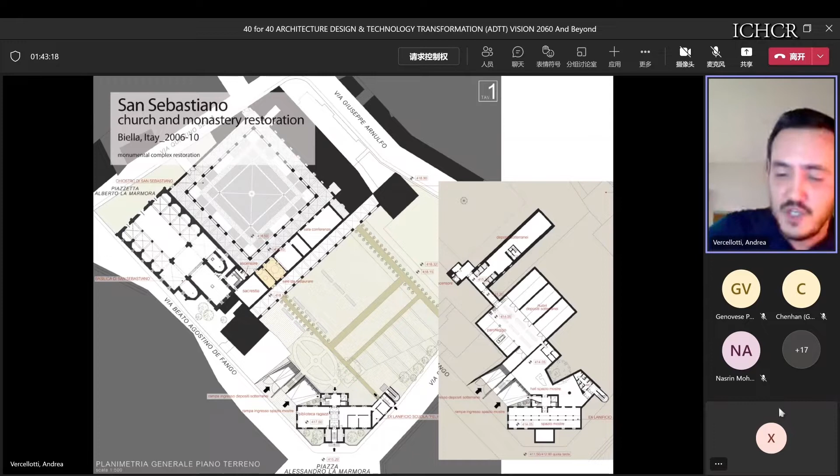I can show you other images. That was the cloister, partially renovated slowly by time, the building repaved. As I told you, it became a sort of open piazza. That's the design for the underground spaces. And then the inside was slowly transformed into an archaeological museum. So that was really a typical Italian project.

Then I had the chance to be part of another very interesting project. This was a project where I was not the main architect - it was a project of Antonio Citterio and Patricia Viel, two designers very well known in Italy and even all over the world. It was another project very related to memory and the sense of historical places.

This is a project done in L'Aquila, a city in central Italy, not far from Rome, that was strongly damaged by an earthquake. All the churches were damaged, so they were closed to their function. The municipality decided to build a temporary church with some temporary functions for the people affected by the earthquake - houses, a canteen - but trying, in a certain sense, to give a contemporary interpretation of the historical role of churches and their spaces in the city of L'Aquila. So this has been the project.

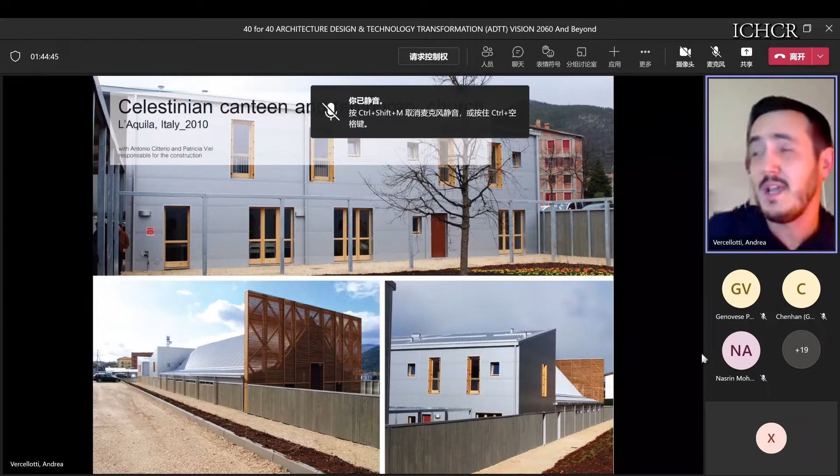It was all done in wood and prefab, since it was temporary. You can see here the typical facade from the Abruzzo region, so it was a reinterpretation of this. It was a great effort to reconnect this building with the neighborhood close to it, and in a certain sense create, even if temporary, a piece of the city itself. Some images - that's the general maquette and the general project.

Another very small project, but one I found very interesting, was the Taiwan Food Culture Pavilion for Expo Milan 2015. It was a very small and simple project, a wood pavilion, all built thanks to fundraising.

But it was very interesting for us because, in a certain sense, it was a critical approach to the Expo and to those kinds of events inside the city. Instead of working inside the precinct of Expo, out of the city, we asked the municipality to locate it in the core of the city.

So we were located in Piazza Santo Stefano, 500 meters from the Duomo, the Cathedral of Milan, and we used this pavilion to create a sort of small device that produced different uses inside the space of the core of Milan. We can call it tactical urbanism, a word I don't really like, but in a certain sense it was a small tactical urbanism. All the area was made pedestrian. Different uses alternated during the year of the Expo. The State University, which is behind that building, was very much part of the project - students were there to rest, to study. So it became a very interesting relation between the architectural object and the uses of the city itself.

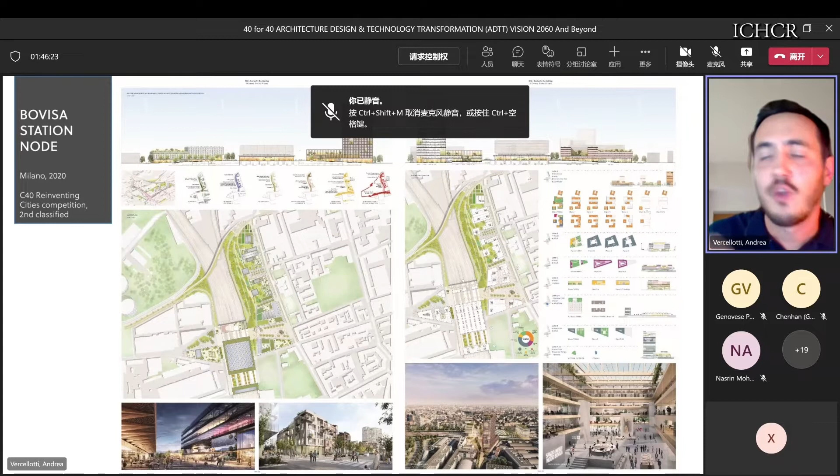As I told you, the kind of projects I face and the kind of projects I'm part of really changed when I moved to work with Arcadis Italia. I told you I entered the sector of urban regeneration before as a consultant. Today, from this year, I'm sector leader for government, so I'm responsible for Arcadis in Italy for all the big projects of urban regeneration related to private investors and urban authorities. We do this all over Italy, in Milan, in Genova, in many contexts.

I can give you a few examples to help you understand how the kind of project changed. This was a project, second classified, a big disappointment, for the Bovisa station node - an entire neighborhood, an infrastructural node, one of the stations of Bovisa, to be completely rethought to connect the two sides of the city.

So that was the station, but it's more visible in the next image. I was leading the project on the Arcadis side. The main architect was One Works, another important Italian firm.

Now the effort was again to recreate a connection between the two sides, starting from some environmental items. For example, we decided to maintain the so-called Bosco della Bovisa forest, a self-produced forest inside the city of Milan. We tried to recreate a connection between the open spaces with a bridge that connects the two sides.

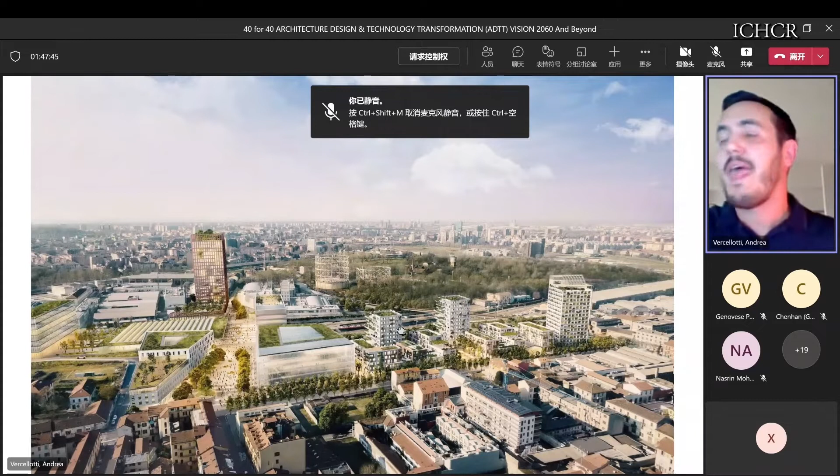This is the station, and this is the new headquarters of FNM, a private railway society. At the roots of all this process, we interlace and coordinate many approaches that give sense to the project - from water management to pollution, to dialogue and social interaction with the borough itself. All the different disciplines, till the economical items, were merged together to produce this project.

You can see that's the main square connecting the two sides. This is the main building in front. We were even asked to include the La Scala Theater, so we thought about some performing art spaces in front of the station. That was the result.

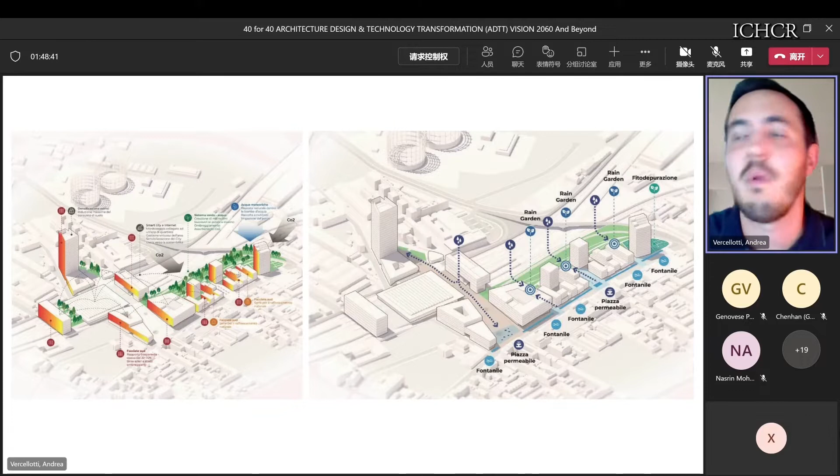As I told you, at the base of the project, each discipline produced its conceptual diagram, conceptual scheme - here in terms of climate adaptation, in terms of water management. We tested many solutions, not necessarily technological. We always think that technology is not always the best solution. We try to work with other levels of the project to create sustainability from many points of view.

The main item was to make the client understand - if you consider the plot at the scale of the plot itself, it's very difficult to imagine a future for the area. But if you approach it with a wider point of view, you can transform this area into the core, the connective element between a lot of very important poles all around the city - which is, physically speaking, this connection.

This red line will be a so-called cycling highway, a main infrastructural sustainable mobility network that will connect very important poles for the city of Bergamo, creating a system that will regenerate the entire southwestern part of the city in the next decades.

So that's the main plan. Here you can see some objectives like the previous one: no cars at all on the surface, all the cars go below, complete de-paving of everything. It will be an energetical community, completely self-sufficient, etc. But it will also be infilled by significant functions that maintain the memory of the place as a productive place, as part of the industrial history of the city, while including new possible uses.

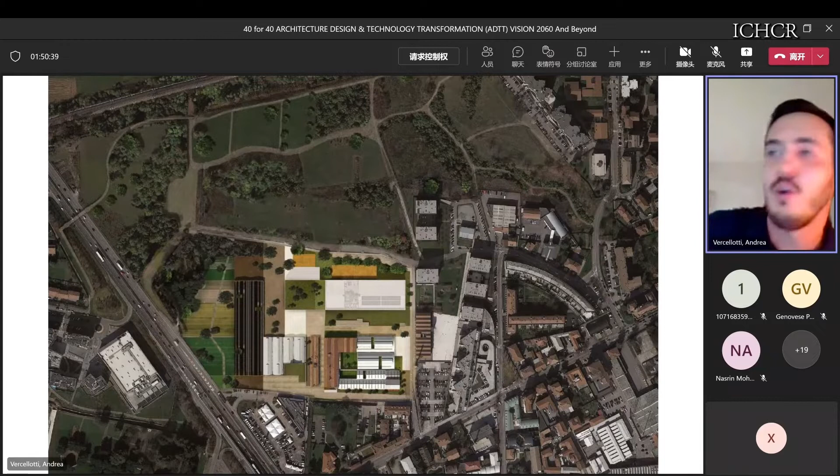These are some views. It will be completely open to the city - that will be the main piazza, that will be a sports center. And now, what started this summer is that the working area is active. Fortunately, we succeeded to start - in Italy, it's not always easy to start with projects of this size.

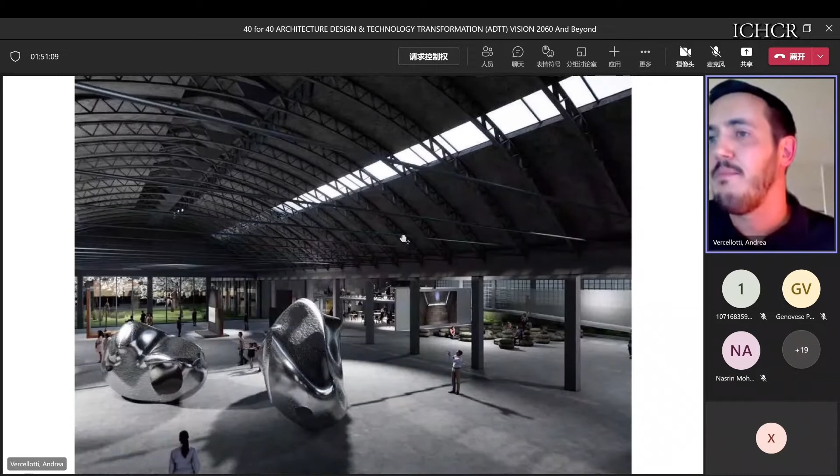This is the contemporary art space for the city of Bergamo. It's a soft intervention on an existing building that will be transformed with just a few adaptations into a center for contemporary arts, with a garden inside, and all the rest.

Last one, to stay in time, is a small project, but it's very important to make you understand which kind of processes we propose to the city. This is a small project in Paullo, a city in the southeast metropolitan area of Milano - a small town that was an agricultural village that exploded after the economical boom after the Second World War, never producing a center.

So we were asked to transform one building. We said to the municipality: we have to transform the entire central district of the village, so we have to create a new centrality for the town of Paullo.

So starting from this project, for the new cultural integrated center with the library and other social activities, slowly all these buildings will be regenerated, restored or transformed and rebuilt to create a centrality. A few images very fast because the time is gone.

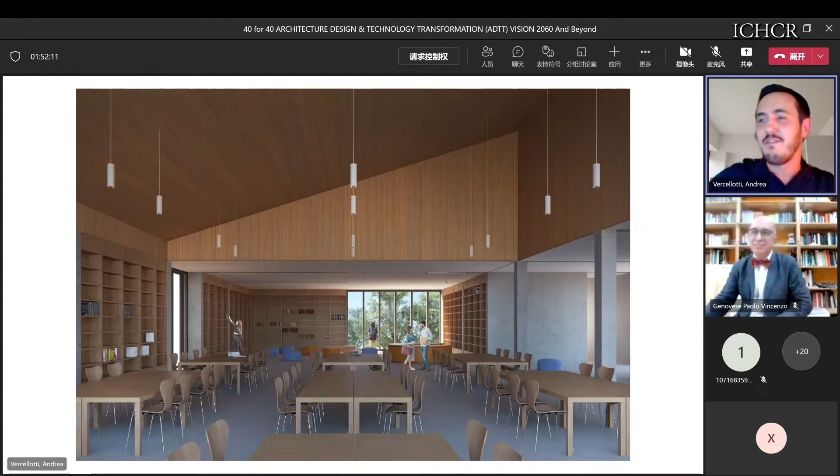To answer your question, Professor Genovese, I haven't followed your request of making a 50-50 intervention, but I really think the next 40, 50, who knows how many years of my life are concentrated in these kinds of projects. In a country like Italy, where the population is decreasing and we've built everywhere, the main task is to give new sense and continuously recombine the sense of pieces of the city we work in.

Thank you very much. Thank you. Very interesting project.

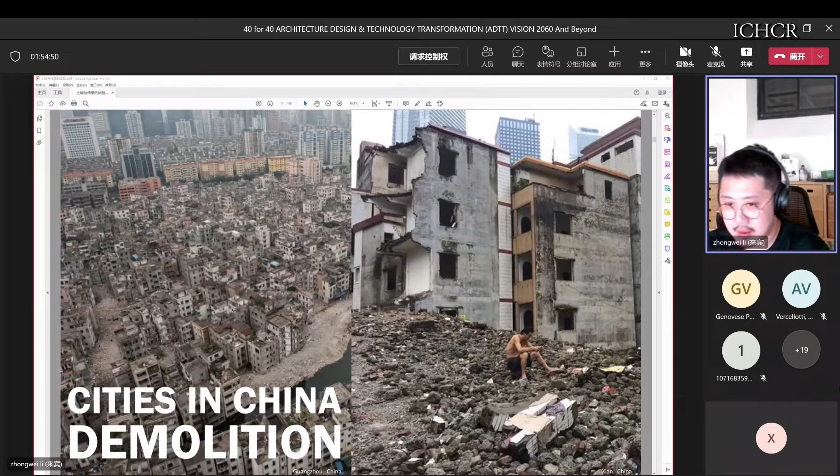And also by the city booming, we demolish so many villages and buildings in the cities, at super high speed. And instead, we replace them with a lot of meaningless structures, architectures, and landscapes.

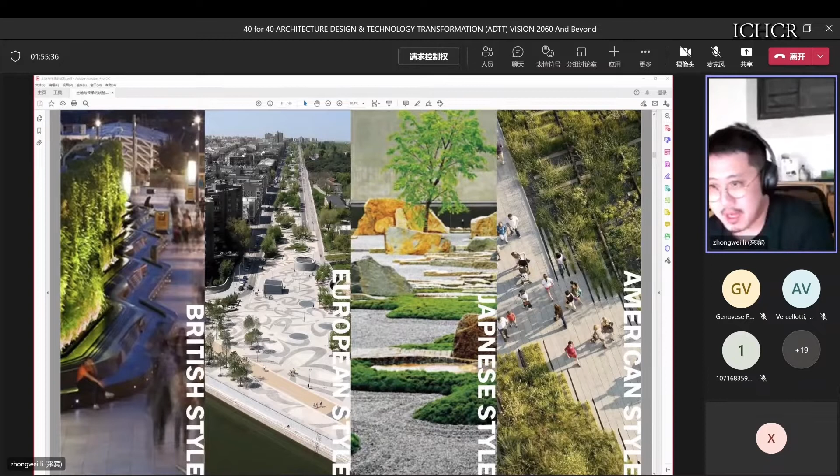In the following decades, we keep copying from other countries, from British, European, Japanese, and Americans. This project is from maybe 10 years ago. People think Chinese creative things have become more creative now, but I don't think so. We're still copying from Westfield in London, Madrid in Spain, Japanese designs, and the Highline in America. We're still in the copying process.

People call them 'Burning Man.' So many people gather in the desert and create crazy structures and hold super crazy carnivals, then they burn the masterpiece after 7 days. We think the whole of China right now is in this crazy Burning Man show.

People always say existence is reasonable, but I don't think so. Existence is not necessarily reasonable - only those that have passed the test of time are reasonable. That means we don't want to stay in the dream. We want to be real.

That's why we came up with our topic, Dirt and Heritage. In Chinese history, over the passing times, dirt and heritage are inherited in our paintings at large or small scale. It also shapes our landform, and our landform or geography shapes our culture - just like what's happening in Chongqing, Chengdu, and Shanghai, which is a delta, meaning people there are more civilized and more business-oriented.

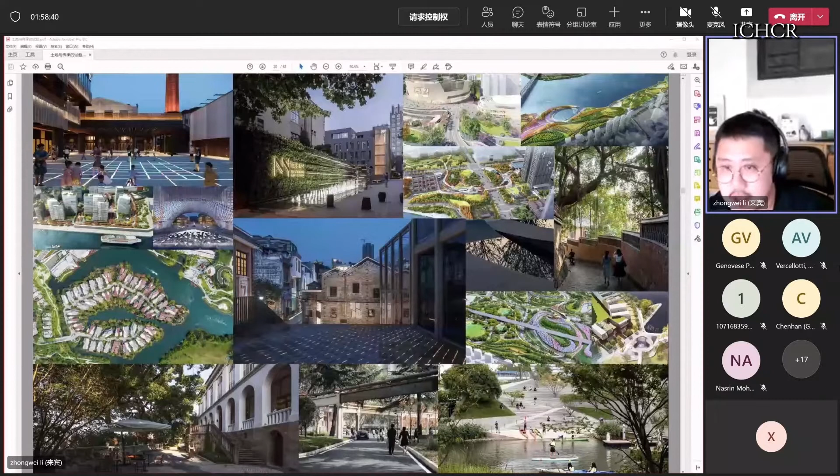This collage shows our office photos - some projects we are working on, some being built in the future, and most of them related to these two words: Dirt and Heritage.

In our ideas, when the scale is getting smaller, we are more inclined to treat them in a heritage way. And when the scale gets bigger, we are more focused on dirt - we research landforms and land art.

About dirt - like the project we did in Chengdu, we created valleys to let people have a different feeling playing in the parks. We have water, mist, and nature combined with concrete to shape and bring nature and some memories back to the cities.

We try our best to mimic how water cuts the land, how nature shapes the world. This landform is like the Minjiang valleys, where we're searching for a way that shows how the water comes to Chengdu.

This is another part of the park. We're trying to create an interesting canal which mimics the way people deal with water in Chengdu, where children can play with water or with canals just underneath the water level in the parks.

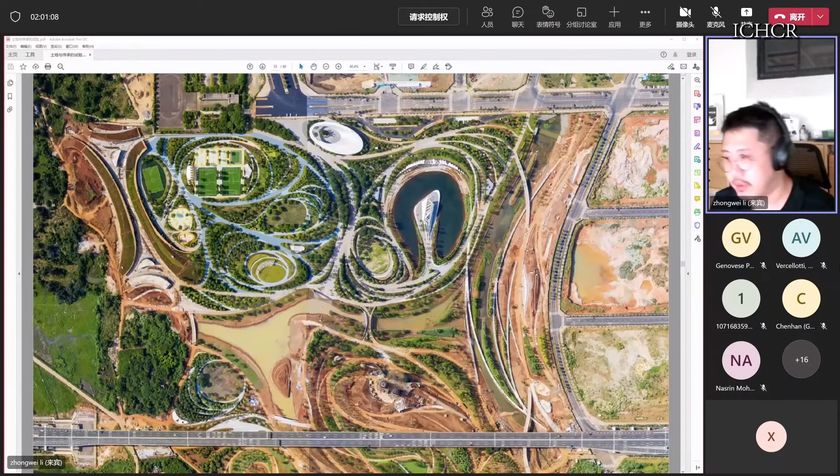We also have so many middle scale or large scale parks like that. About heritage - it's how to keep the memories, just like how we reshape some useless

engines into landscape elements to let people enjoy them, or we directly make a pipeline into seating elements or green walls. We recycle useless things into useful playgrounds.

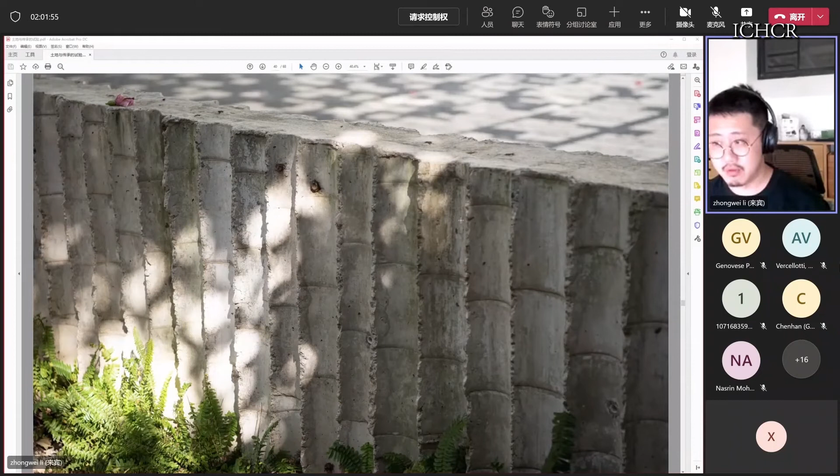We're also trying to use leaves to print them onto really boring concrete. We can recycle useless borders and make them into water features. Or even in the concrete, we use bamboo to print patterns to give it more

memories. Even with the cheapest material, we still try to keep some memories of neighborhoods, some lifestyles, in the design. Even you can see this is a concrete step.

We try our best to add more details on top of it. You can see how people get involved in the memory and the design.

Even at night, we try to add more art to the existing trees or shape the existing borders into linear water features. Maybe everything can be recycled and everything can be redesigned.

We also can recycle by checking libraries, searching for old photos and making them into new designs, turning the real black and white photos into real works.

We respect all the trees and try to let nature and history come back together. We can even make hidden ginkgo trees visible to the citizens.

We save the dying trees and make them into landscape elements. We also try to keep all the trees and create a site which is subtle, decent, and full of nature and memories from day to night.

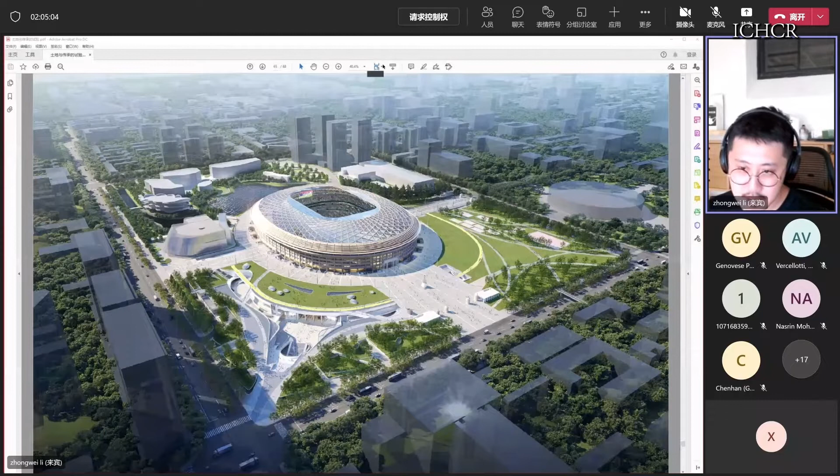What's happening now combines landscape, mixed use, heritage, and dirt together - just like what's happening in Beijing or Shanghai. These are two projects we're working on. I think we will not change, and we will stay with reality and keep researching dirt and heritage.

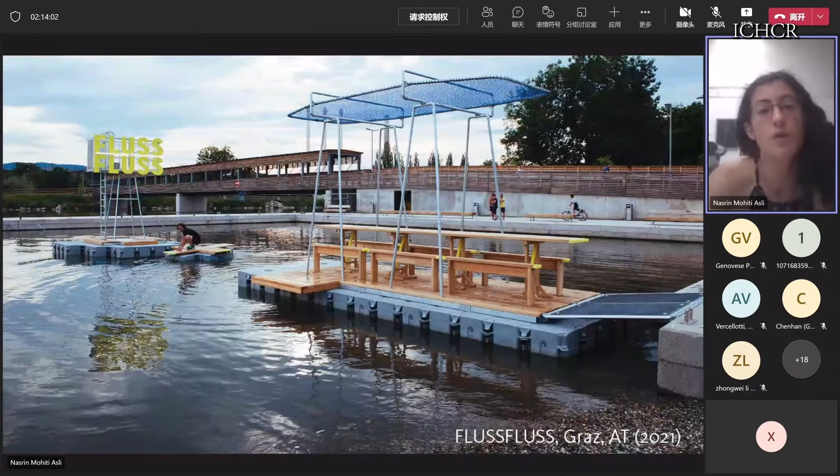You can imagine, you can be not just a user or a consumer of space, but you can be an active creator as well.

So this infrastructure always plays on a balance between balance and chaos, because we tend to put together different elements which can be really diverse and seem to be far from each other. People from different cultures, different languages, different backgrounds as well, and we see together during the architecture project process what the outcome can be.

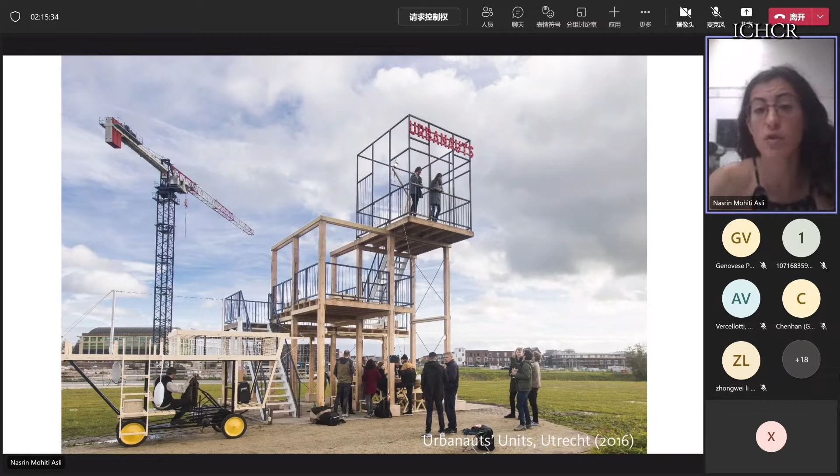Our structures tend to be open. One of the objectives is to make future development of the project happen. So we don't think our designs are finished, but we are more interested in unfinished structures that can, after their first activation, invite other people, other professionals, other architects, artists, creators to do something on them, and to feel a belonging to these

projects and places. Then with our architecture, we also want to make space for the ordinary and the extraordinary, in a sense that we want to stage daily life and usually normal, also seen as boring, behaviors, like just chilling in a place or having a chat with someone, or just staying by yourself to think, but in a generous way, to be under a shadow.

We want to create that kind of benefit from a space, but as well to host and give the possibility to create spectacular moments of collective memories.

Our idea of architecture is to always be in progress, always changing. I found it really interesting, the request of the past and the future. As Orizzontale, our practice is based on present moments. And we believe that time is the most important factor in architecture. And we believe in structures that can also be adjusted within times.

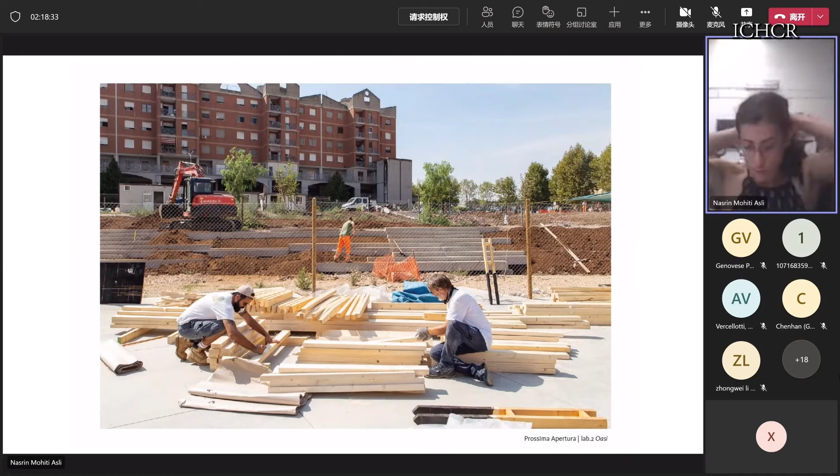Architecture is one of the main components of creating urbanity. So architecture should get help, let's say, from, or should create a collaborative process also with, other professionals from other fields. For example, in opening public works, I'm showing now Prossima Apertura, which means next opening, in which the main core of the project was to make an open design as well as open up the building site of a public work, which is really difficult bureaucratically speaking, because we tend to make public spaces with precise, rigid norms.

But the interesting part of this is that opening an area of creation also to inhabitants, and opening a dialogue with, for example, psychosocial research, biologists or anthropologists, can lead to other images of the cities, and can also help us as architects to make always better projects and try to make fewer mistakes.

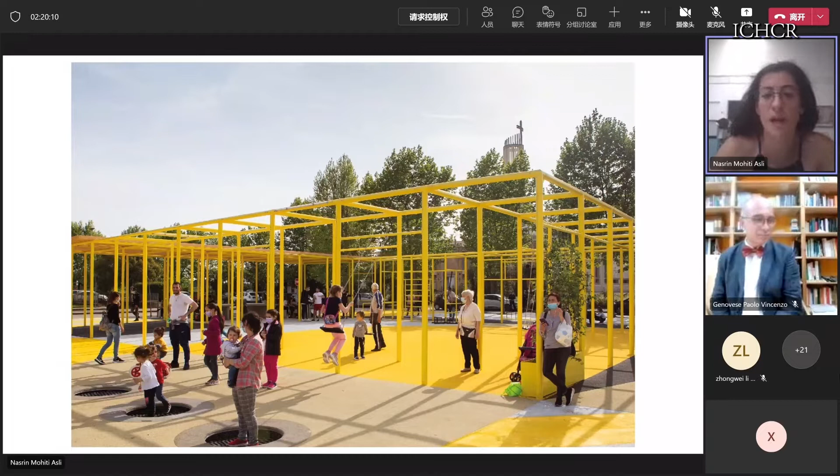So this is also for us a vision of the future. It's not a specific still image, but it's a methodology, an approach, and a way of doing. Thank you.

Thank you very much, it's very interesting. I was really interested in your work because this is part of my research concerning the eco-village approach, social participation, and the bottom-up approach. Your group demonstrated that architecture can be huge, like cities and macro structures, but also small, significant insertions in city life, and I really appreciate this form of active relationship with the population. Thank you very much for your work. I know you are busy, so maybe you cannot join our final roundtable. If you can, you're welcome, but please feel free to go to your obligation. Thank you very much.

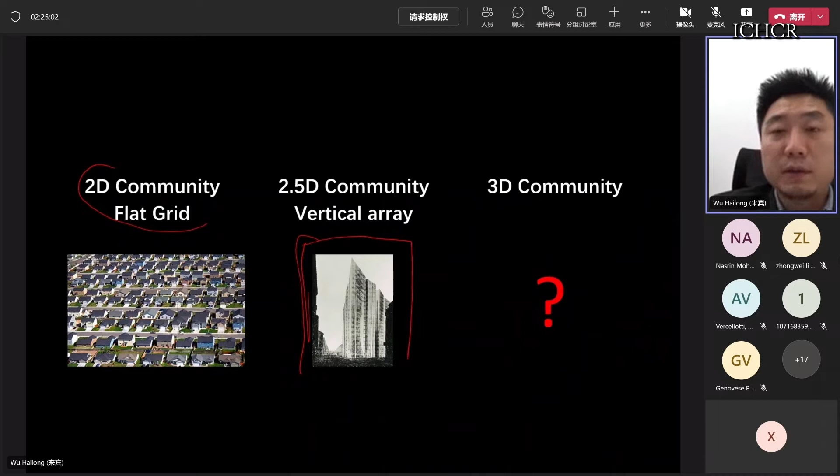Second, in terms of space, I think the main work of an architect is the organization of space to make it work in different environments. In terms of space organization, we have the flat grid, which I call 2D space or 2D community, and we also have the vertical array of space, which is high-rise building. But I think it's only 2.5D community, because it's only an array along the vertical direction, it's not wholly 3D, which is our work to make our space work that way. So I'd like to show you some work of my office in terms of 3D community and third nature.

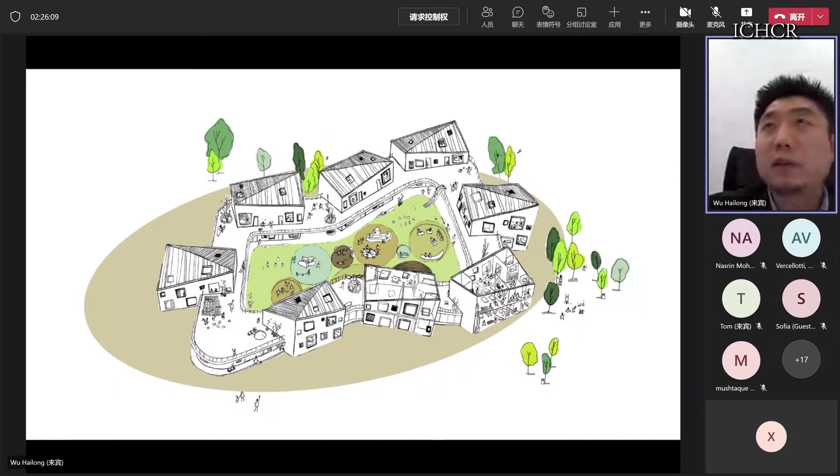Now you see on the screen is a kindergarten we designed in Shanghai. The kindergarten is surrounded by a residential community and has very bad accessibility and a very bad view. But what we did is make it like a bonsai at an urban scale and put it into the plot. So we got what we call a super toy, a special toy that kids can play with.

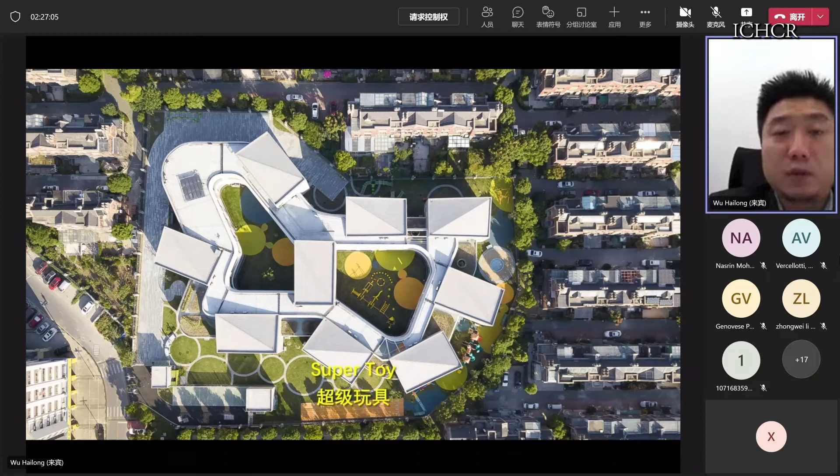The space organization is like this: this is the basic program volume we have, and we organize the facilities building space in a loop, and put the classroom onto the loop. So we got the classroom and the leftover space, which we could turn into multifunctional space. Finally we have an office building for teachers. The organization is like the loop and the basic unit of classroom.

This is what it looks like at the urban scale. So it is totally three-dimensional, where children can have access to the terrain and the courtyard and the playground, use the garden in the sky, and run in the circular landscape playground here. This is two courtyards divided by the office building and the garden above.

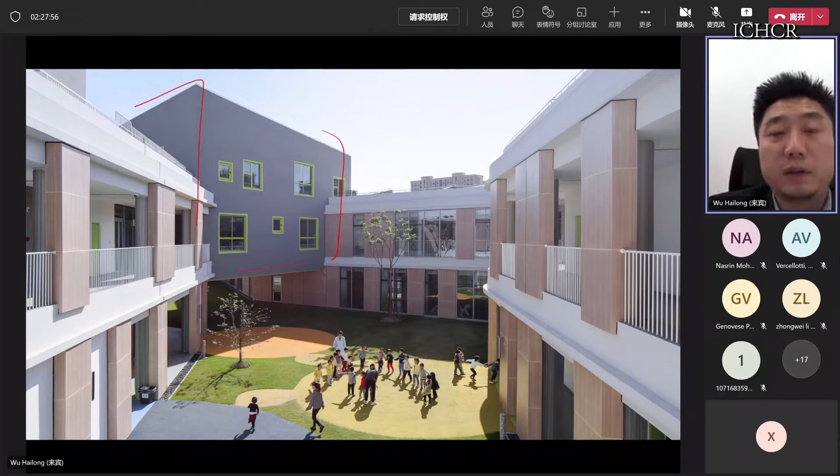So we changed the usual organization of the building. We have the standard classroom here, which is square, and the leftover space below. So in the basic unit, it's very functional, good, very easy to use. And for the leftover interior space, we have different spaces with different shapes, which we could give different programs, like a Lego room.

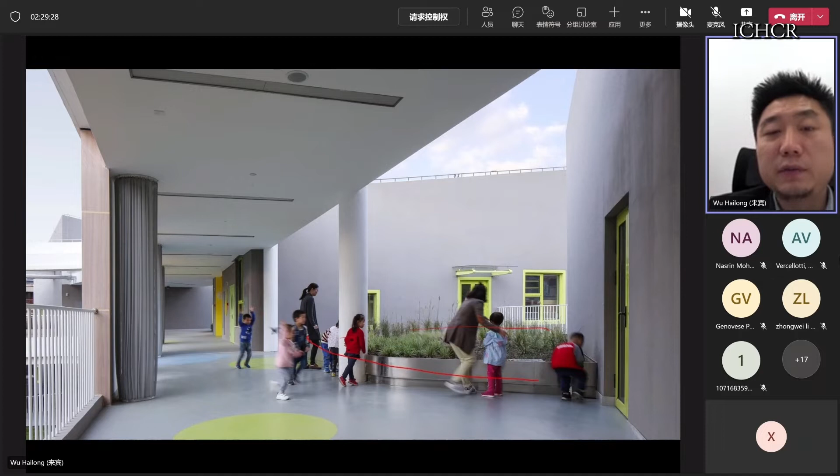This is the corridor, which is also irregular space, but children really like the space because it has different possibilities and opportunities for children to find their own use of the space. We also have exterior leftover space, which we turned into a sky botanical garden, where people can identify which kind of plant it is. Also we have the access and staircase, which is also irregular space.

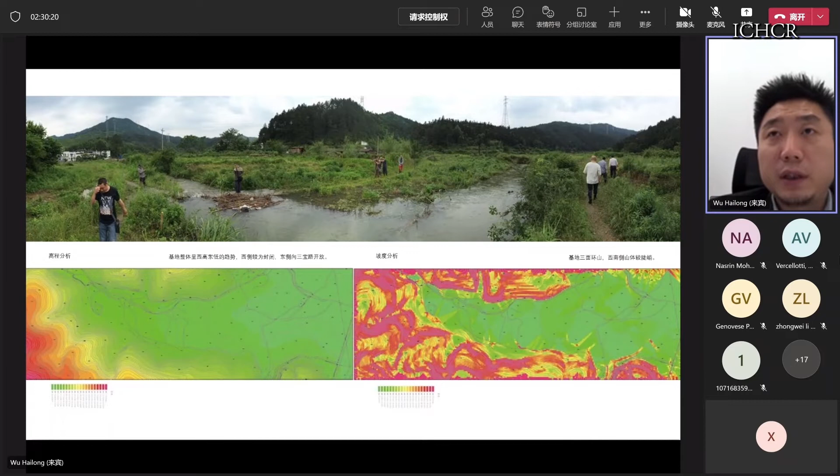The next project I'd like to show is what I call Gallery in Nature. Actually it's in a very large artist village, for which we also did the planning for the community. This is the nature space of it, in a valley, with very different conditions from urban space. This is the first visit to the site, and what I'd like to show is this building.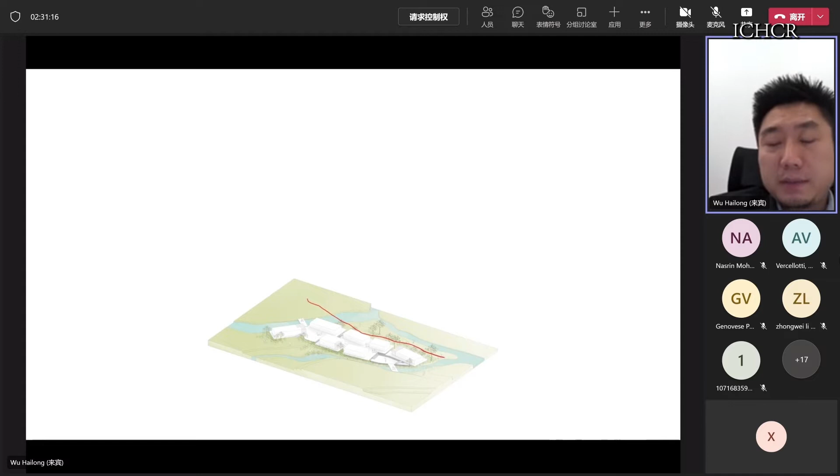We keep the original land and just put the building slightly on the original land, which we think of as third nature. It's beyond first nature and second nature. It's not simply original or artificial—it's a complex of artificial and nature.

In this space, we have steps which follow the landform, like a very soft space over the land, so we can feel the original land from the built environment. This is what we want to show to the visitors. We also have trees between the buildings.

And all of this glass box could give the people in the studio a very wide facade to show the artist's work. Actually, every box is for this—it's a studio for craftsmen or artists in the art village.

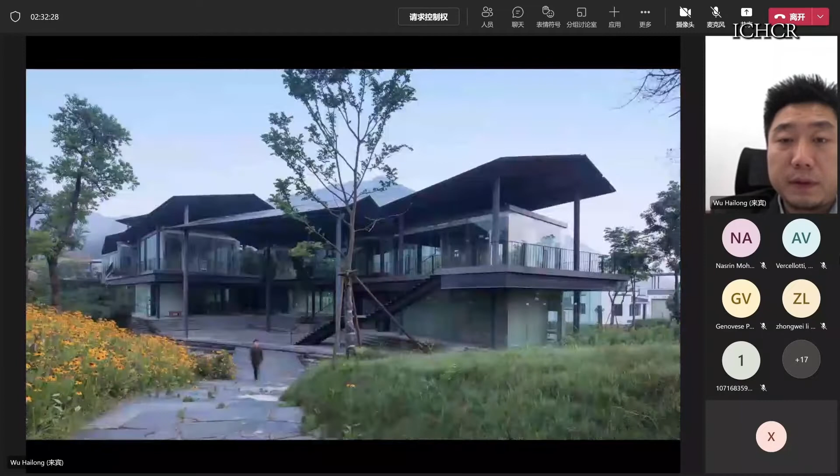The artists like the space very much because they find they can show their work in nature with the largest facade. And we also have the gap which shows the nature and lets nature in.

Another project I'd like to show is also the combination of 3D space organization and the intervention of nature and landscape. It's also a kindergarten, but different from the first one—this one aims for very low energy consumption. So we studied the environment and the arrangement of the building blocks to shape it; it not only follows function but also follows climate.

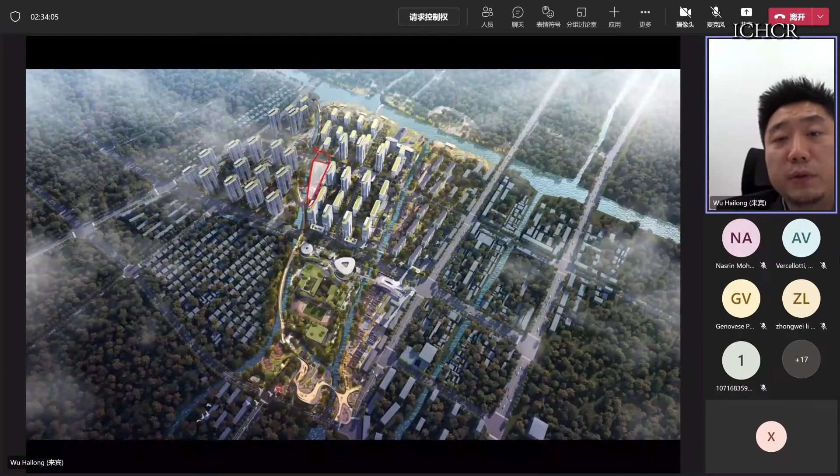It's on the corner of a very large residential community beside the river, and we studied the sun and the river to make the building into blocks with that kind of organization. It's a landmark, but it's also landscape.

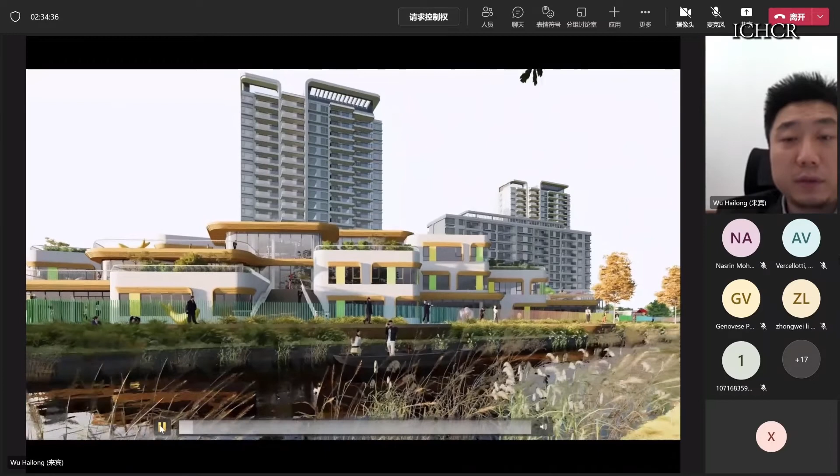Let me show a short animation here—let me make it faster.

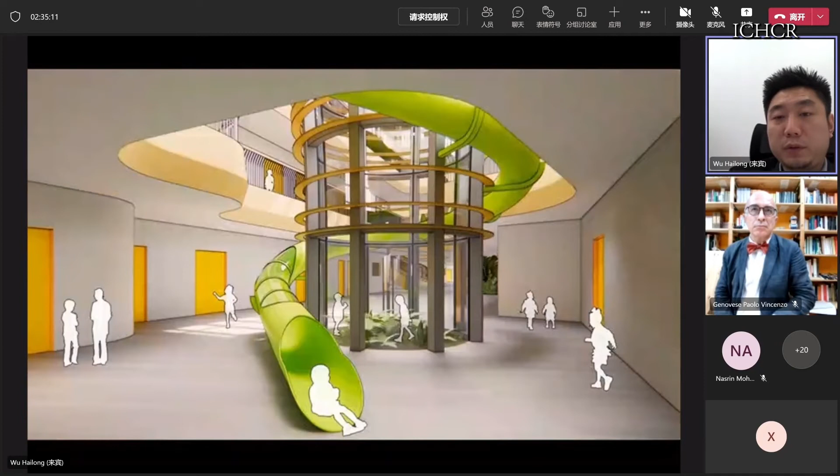This is the interior. In terms of the vision for the future, I'd like to focus on our topic, because in China we have a very high urbanization rate and a very low nature growth rate, so buildings in 40 years will be very different from now. But we also deal with the relationship between environment and space.

We like to face the challenge in this way. I think we could expand the field of architecture a little bit. For example, in terms of the 3D community, I think it connects space more efficiently and more interestingly, so we expand the field of architecture through 3D community.

And this is what we have done. We also expanded the architecture field toward landscape, but in between we got third nature. So this is how we want to face the challenge in the future, with two strategies: third nature and 3D community.

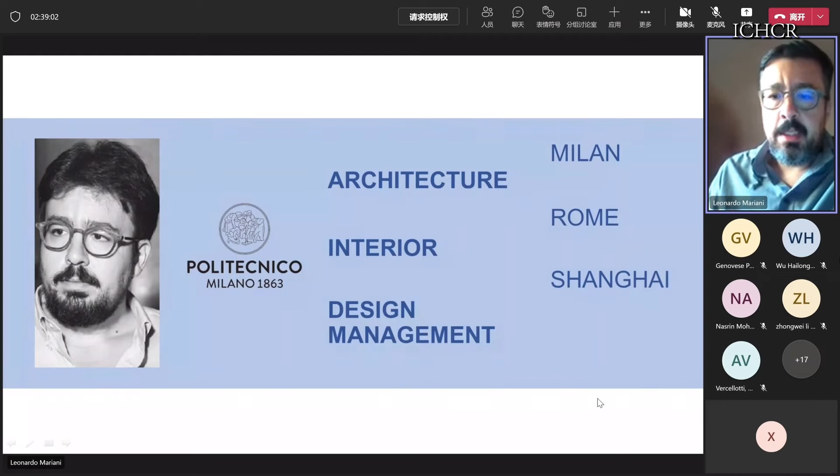I'm currently working, since 14 years now, at Valode & Pistre, a French firm that is an international firm and has been in China for more than 17 years, with offices in Paris and in Shanghai, where I work. Along these years we had the chance and the fortune of working on very big projects, normally all large scale, public projects, exhibitions and so on.

Today I'd like to take the chance to talk about 3 projects, but I will not talk about the projects themselves—this is not advertising, it's about sharing my experience. So I will talk about these projects very briefly in chronological order, also to tell you about the progress that I've seen and experienced personally.

I think to understand the future, the most important thing is actually to look back at our past and to look at what's happening today, and then we can probably foresee what's coming, at least for China.

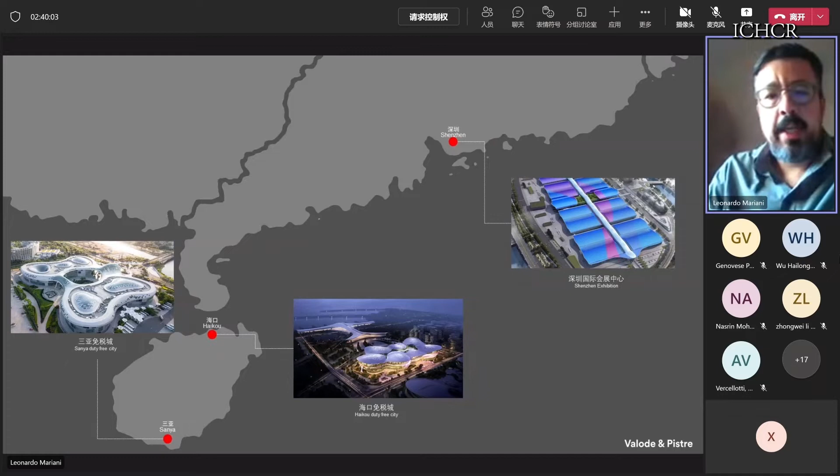I'm talking now about three Chinese projects. The first one is in Hainan Island in Sanya, a duty-free project. That's the island, that's the project. It was designed and built around 2012 to 2014. It's relatively small in Chinese sizes, around 120,000 square meters, and is a shopping mall. It's a little peculiar because the site itself forced us to split the building into two pieces with a central courtyard—this was from the planning point of view.

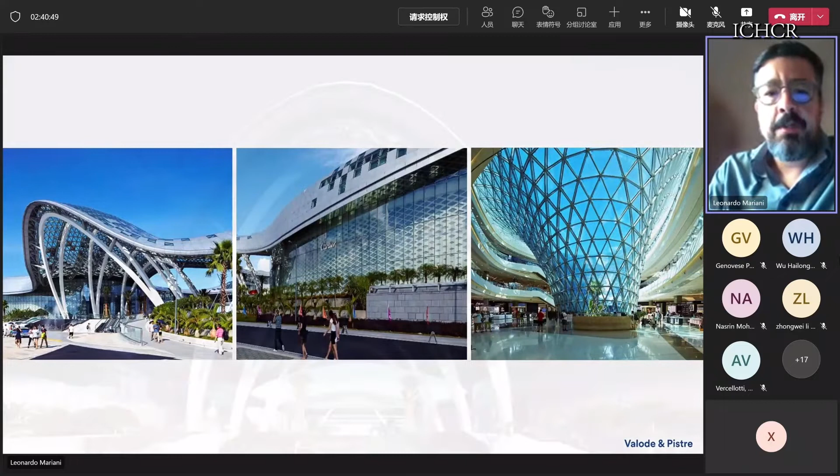For this project I'd like to focus on some special features related to the advancement of technological progress in architectural design. We start from the entrance of the project, where we have very large, super-scale arches designed with the aid of 3D Rhino. We worked together with an English structural engineer on this, from China to Paris to the UK, to reach this result that at the time was state of the art for us.

As well, for the overall shape of the building, the movement of the roof and the central courtyard, we started working with environmental software to calculate the wind speed. Sanya has a tropical climate, so we were concerned about the reaction of hurricanes on the project. We made it so the architectural shape could also respond to the weather and the situation of the site. We integrated the landscape and water feature given the climate condition—it's very hot, in the south of China.

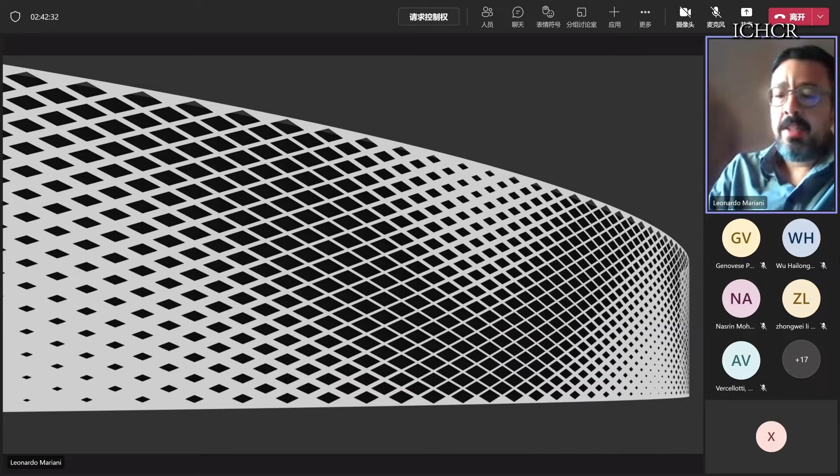Here we come to the special facade, the main facade as you approach the project. For that we took inspiration from the fish, since Sanya is an island, again linked to the seaside. We worked very hard at that time in Rhino and Grasshopper to study a pattern on this facade that could recall the natural element in a stylistic way. At the time, that parametric design was state of the art for us. We worked with consultants—now it's kind of basic work for us, but it's funny to recall how at that time it felt like science fiction.

As well, since it's a shopping mall, we have a central courtyard where shoppers gather. We designed a funnel shape, and at the time we worked very hard on the subdivision, manually working on the whole object—the result is, I think, far behind what we could do today. But at that time it was one of the technological challenges for this project.

At the same time, we are still working on this site because we're now in phase 2 of this project, which is currently under construction.

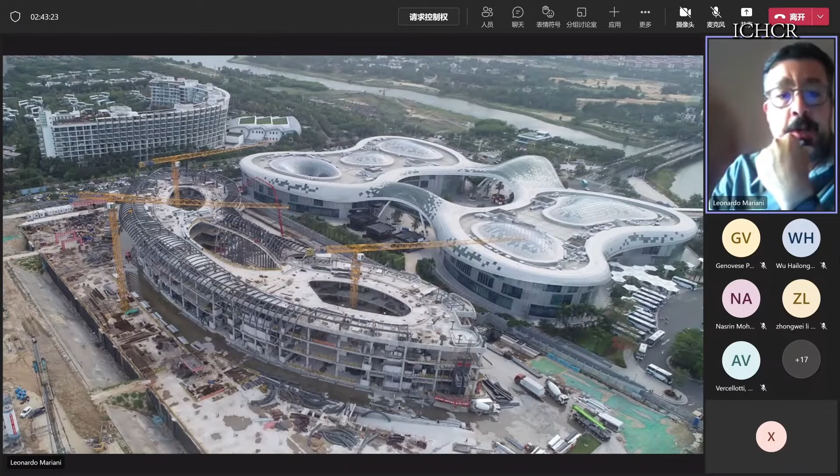The second step, for us as a firm working in China, was also a kind of milestone: the Shenzhen World Exhibition and Convention Center. This is so far the biggest project we have realized and delivered worldwide—about 2 kilometers long, an exhibition and convention center in Shenzhen, which, as mentioned before, is a very dynamic and rapidly growing city. For this project again we had our fair share of challenges, aided by technological advancement.

The first challenge was that we wanted to bring the culture of Shenzhen into the project with very simple, strong cultural elements. Based on the Silk Road concept, we wanted to bring together this huge project through the roof. So the fifth facade, the roof, was actually the key design aimed at linking the whole project together. We designed this color stripe, using in the end 7 different colors for this roof.

It's something very unusual for any project, a color roof we discover. At the end, we went to select 7 different colors for a total of 800,000 panels that have been positioned one by one on this roof.

In this case, the concept was very simple. It took around 4 to 5 months to translate this design into something that could be built. Thanks to the drones, thanks to our aerial photography, we had the chance to really make sure that what we design on paper on a very small scale could be realized in a large scale for real, especially because this project is right next to the Bao'an airport, so it's very visible also from the airplane. We wanted to make sure that the canvas we were designing was correct and beautifully done.

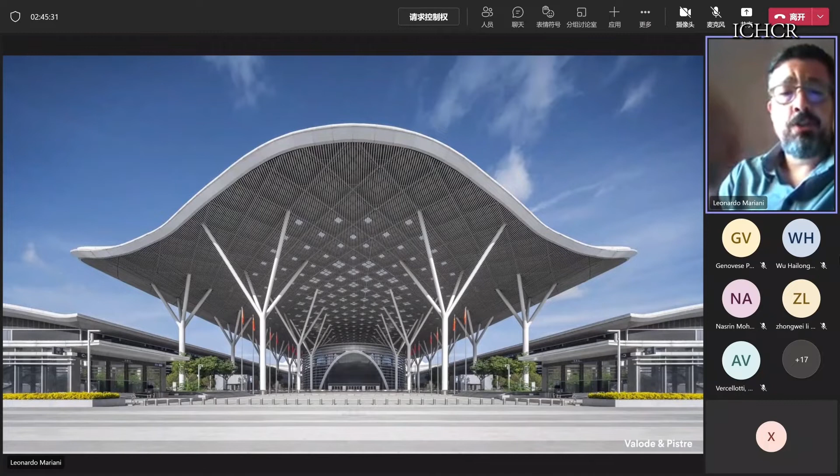For this project as well, we worked on the structure. The structure was not just an element supporting the project, it was a design element. With the aid of Rhino and the aid of our engineers, we worked very closely together, in very close interaction between architecture and structure, to create these trees that recall again the nature in Shenzhen, the mangroves that are typical trees that grow over there. Using this structure and this technology, we had the chance to create this huge roof that is an outdoor space but covers and protects all the people from the sunshine.

Shenzhen is tropical and very, very hot, and this oversized tree and this roof provide shading for the visitors of our venue. The venue is basically a straight axis, and we had to cover it, but without air conditioning because it would be too expensive. It would be crazy to air condition a space like that.

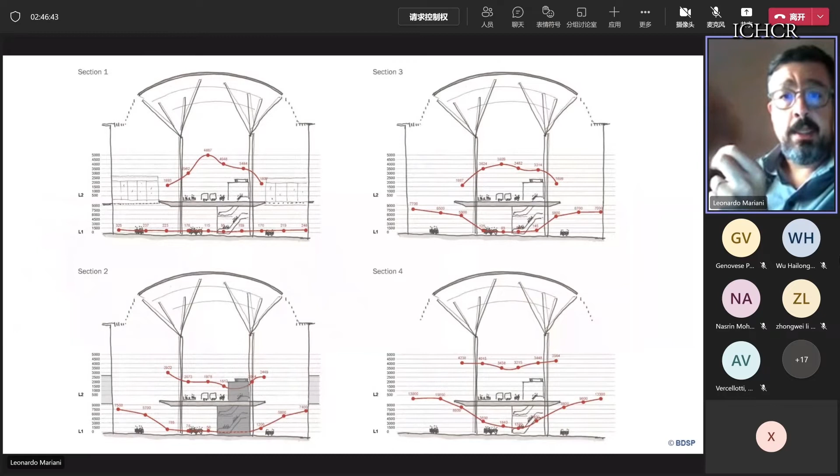So at the same time, we conceived the structure, but this was something very new compared with our previous experience. We worked with engineering consultants to study the sunshine, the good amount of sun protection, while guaranteeing enough daylight and protection from the rain. Being a tropical climate, you need to create a balance between protecting people from the rain, blocking the sun, blocking the heat, but at the same time providing enough daylight and comfort for the people.

And this is the final result of the project, which was delivered now 2 years ago and is now fully functional.

The third step in this path, again all these projects are in chronological order, is the Haikou International Duty-Free City. This project for me is especially interesting because it's again on the same island of Hainan as the first project I presented, and it's kind of the big brother. It's like 5 times bigger.

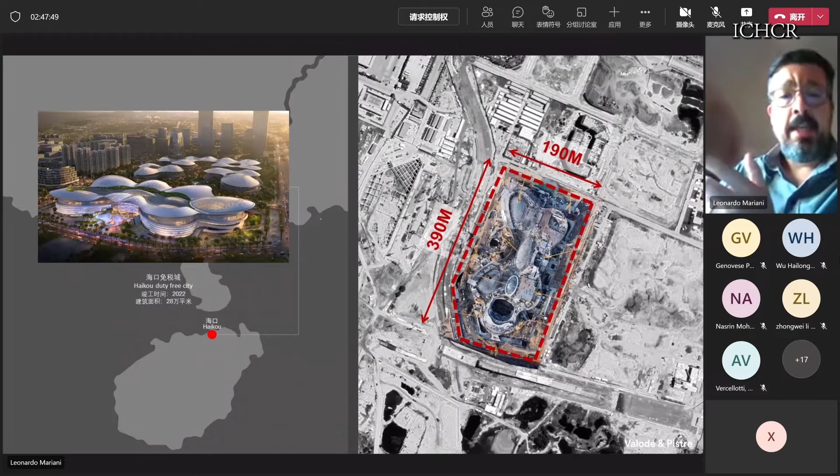It's still a shopping mall with duty-free and duty-paid, a lot of shops, but it's not only shops. It's a new way of doing a shopping mall because they have a lot of interactive elements, libraries, a sports center, probably going to have skiing facilities, even though it's hot. For this project as well, we stepped up the game of how we could translate our vision with the aid of technological advancement in the tools available.

For this project, the whole facade has been designed with horizontal stripes. That's our key feature, and they surround the whole project, which is all rounded. It's very organic, with a lot of cantilevers and a lot of plantations on these platforms. Our goal, the key feature from the people's view perspective, was to guarantee that this facade was something special, where a different scale and a different distance would create different emotions.

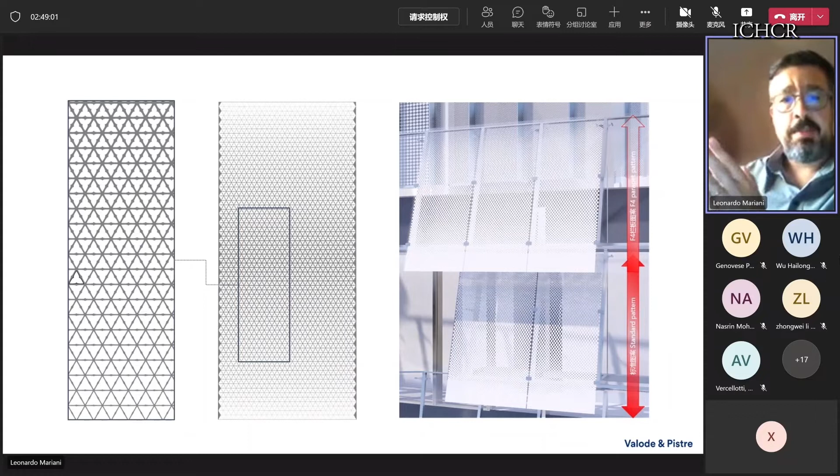What we did in Sanya was a pattern done man-made. In this case we went to a totally different approach. We studied shapes on these glass patterns that surround the project, studying different kinds of patterns with different shapes and different gradients, because in some parts they need to block the view from what is inside, and in some parts they need to be transparent. So we really studied down to the very small details.

Thanks also to parametric design in Grasshopper, we realized a pattern that changes like a skin, changing according to the function and according to the location, because sometimes we want the surface to be transparent to look inside, and sometimes we want to shade it. So a lot of work has gone into this process of study.

As well, we have what was supposed to be a tropical garden - a very big cupola, a very big space in the middle of the project that is currently under construction. It's 100 meters by 85 meters, totally covered.

We went to study the structure together with our engineers and our tools, and we studied different configurations, making sure that the structure and the architecture were studied together in one process. We studied different solutions and optimizations to make sure we have the best result, and also something that is buildable and is the best optimized solution for the client.

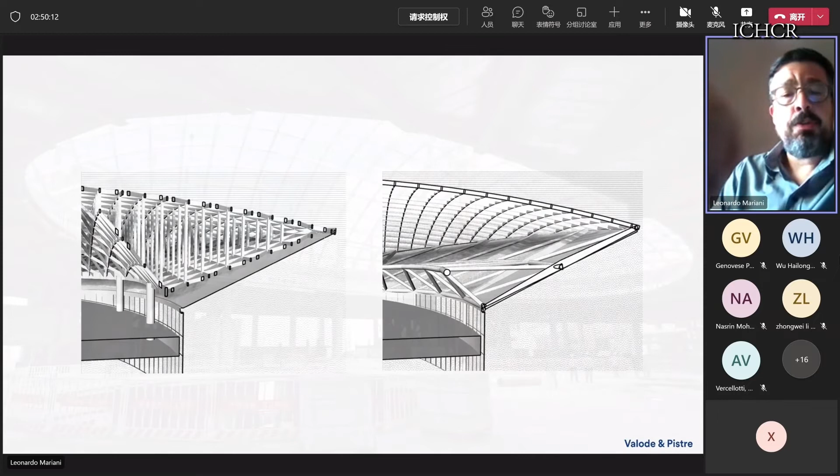So this project is currently under construction. We are going to have probably the opening around the end of September, and it's in very fast progress. I will be a little bit fast on the conclusion.

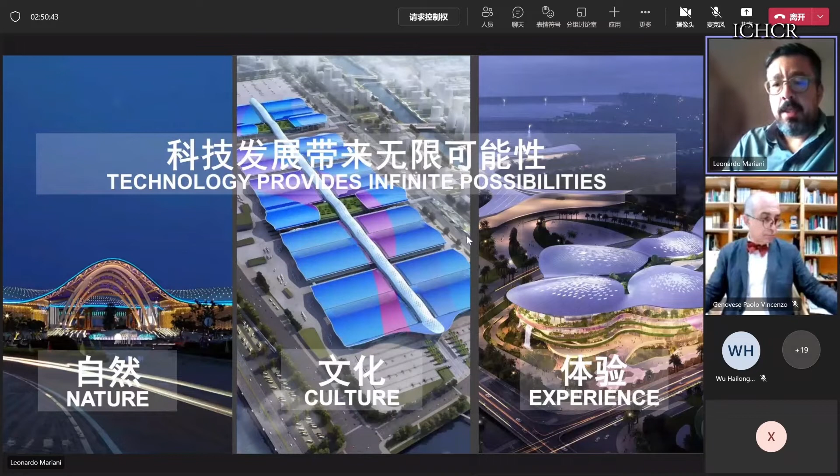For us, the technological advancement in the future is about keeping inspired from nature, bringing the culture element in always, and also trying to provide new experiences for people. But all in all, what we see about the future for the next 40 years and more is about the people. For us, all the advancement we have in architecture, all the tools we are given, they're just tools that will allow us to realize better something that we can envision. But again, at the base of our work is all the people that work with us and all the efforts, using the smart tool and the right tool to do what we envision.

So for all our new projects, we will bring our experience, and starting from this level, we will use these tools again to advance what we can do and create new geometry and new challenges for ourselves. That's all. Thank you for having me here today.

Thank you very much, Leonardo. I'm very glad to have you in our webinar. Your project is really remarkable because in many cases, this kind of huge project, 2 kilometers long, I even can't imagine - they have a low quality of the details, but in your case, you are able to control both the large scale and the thin details. This is not easy. To control the project at every level needs a special touch. But because I am Italian, I can notice the typical quality of Italian architecture - very often based on small projects, but with great attention to the little thin details. In your case, you are able also to generate a project which is really huge in terms of size. So controlling the two different sides is not easy at all. Congratulations for your work.

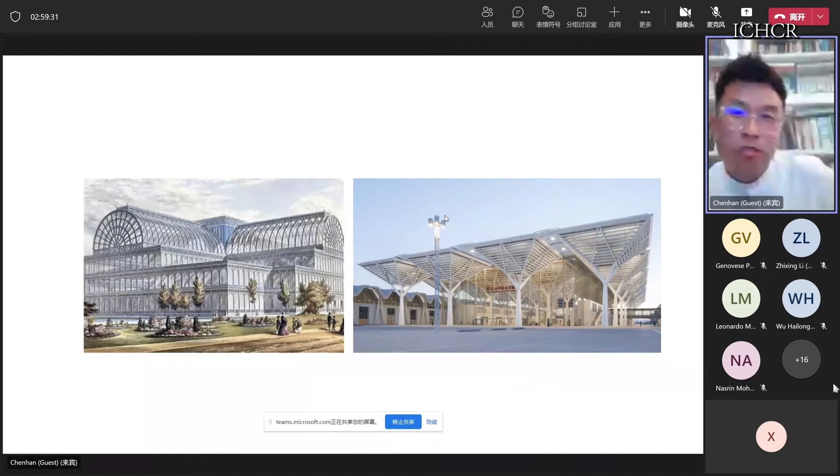As architects, when we're doing practice, we rely on really professional engineers and consultants. They help us make the decisions. Architects do the form design, but what it's going to be is their decision.

Another example of what's happening now is the COVID nucleic acid testing pavilion. It's coming out everywhere in Beijing, Shanghai, in China, because we have to do testing like every three days or something. Now we even have a competition for it, which is quite crazy.

The point is, we don't have our own voice in deciding what we are going to do at the moment. Not like the neoclassical ages, when architects could be the planners of the city, could be the government of the city.

But now we are serving everything else. We're serving capitalism, we're serving technology, we're not serving ourselves. So the question I would ask is, how can architects change this situation for the next 40 years? I'm not sure what is going to happen in the future, because I don't have the eyesight to forecast what it's going to be 40 years later.

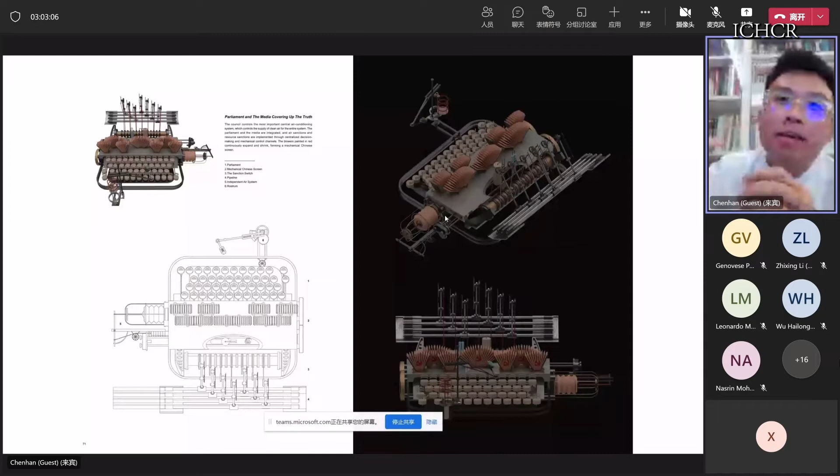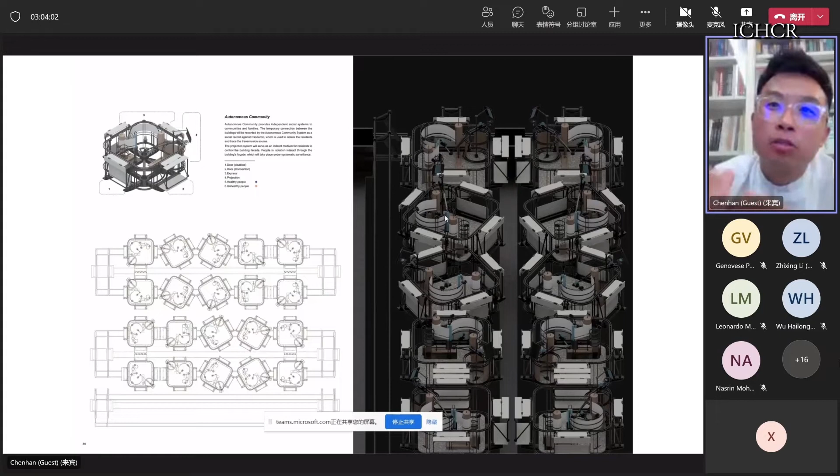The third installation is a community that allows people to communicate via whiteboards, and those whiteboards also separate people from each other. It's a small box you could stay in, work in, or live in during the pandemic. The fourth is delivery, which could deliver food or medicine—it's a transportation system for the whole thing.

So the 4 installations stand for 4 topics or aspects during the beginning of COVID-19, and they work into each other or with each other—they could merge into one another, but they are just on paper. Like I said, these are the installations we tried to develop last year.

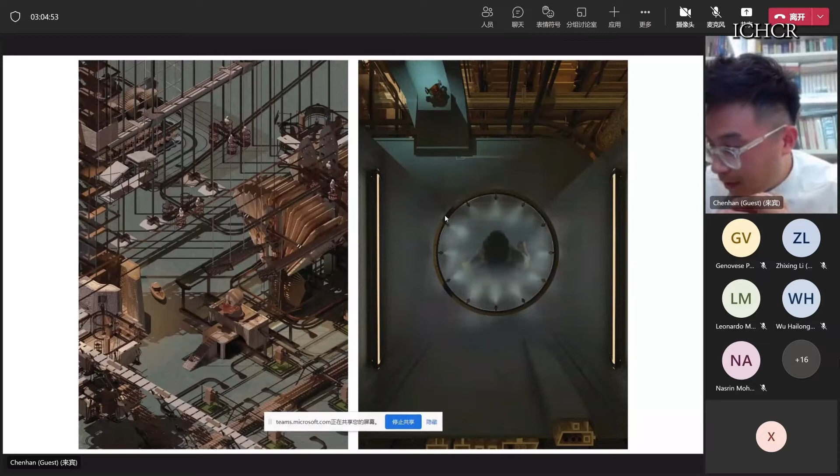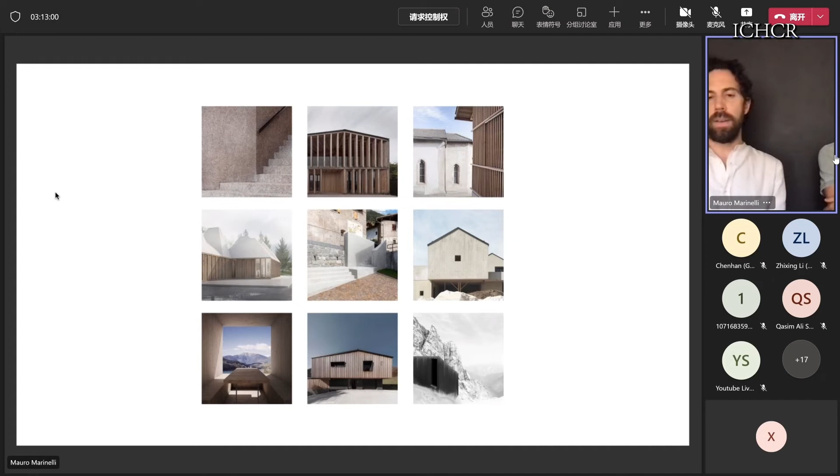Our office has been nominated for some awards in recent years, and our work ranges from a very small scale to urban planning. Now we are sharing 3 of the firm's projects. The first one is Casa Sociale in Caltron, which translates to community center, in a very small village in an alpine valley. As you can see, the building is very small, mostly a hall, and we will share just a few pictures of it.

We think this building shows our sensitivity to the landscape and how we want to create something that blends with the landscape, not in a mimic way, but showing what is artificial, while learning from the landscape—not only from a natural point of view but also a cultural one, because the landscape is almost completely artificial, shaped through the centuries by humans. Here we see the small building and how it tries to play with these rows of apple trees, the main cultivation in this valley, reading the rhythm of the landscape as well as the shape, proportions, and elements of the built-up space.

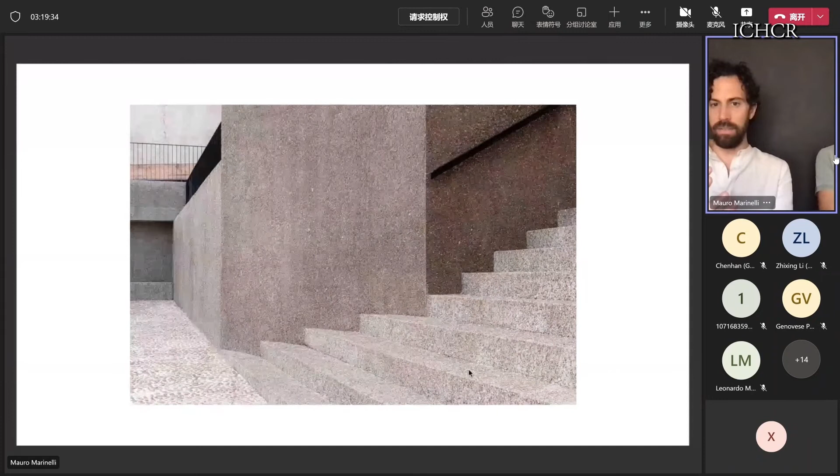This village owns a mountain, and it's something very important to the community — everyone loves this mountain. So by using the same material as the mountain, we try to bring the mountain into the middle of the village, creating a relationship between the very far landscape and what is very small and very, very close to the people.

Here you see one of the stairs that leads to an upper level, and on the upper level we find this fountain, built with stone slabs we found in the construction yard — they were part of a former fountain that had been demolished and just forgotten in the place.

The third project we see today is Bolciana, another public space project. It's a more complex situation because the village is small, but there is a road and 4 main squares, and we worked on each of these squares with small interventions. These interventions are in white concrete and brushed concrete, so it's very rough and muscular, let's say.

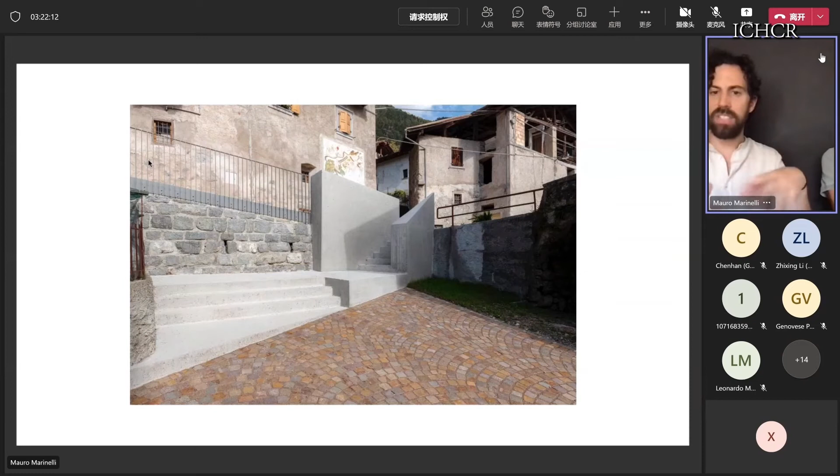All these elements try to define thresholds between the stair, the road, and the squares. Every time we do that, we change the shape of the elements because they somehow read the context and play with its geometry. We try to highlight the edges of the squares like they are rooms — rooms without a ceiling, where the ceiling is the sky. So we highlight the edges of the spaces with these elements in white rough concrete, defining the threshold that connects the spaces and the road.

Sometimes these thresholds involve covered spaces like these, and maybe they connect different elevations. Here we see another picture of the project.

The topic of the future was very interesting to us, and we tried to reflect on that. We, of course, like everybody, don't know what the future will bring us. Probably something we are sure about is that there isn't one future, but many futures depending on the places, the culture, and what the future will bring to us.

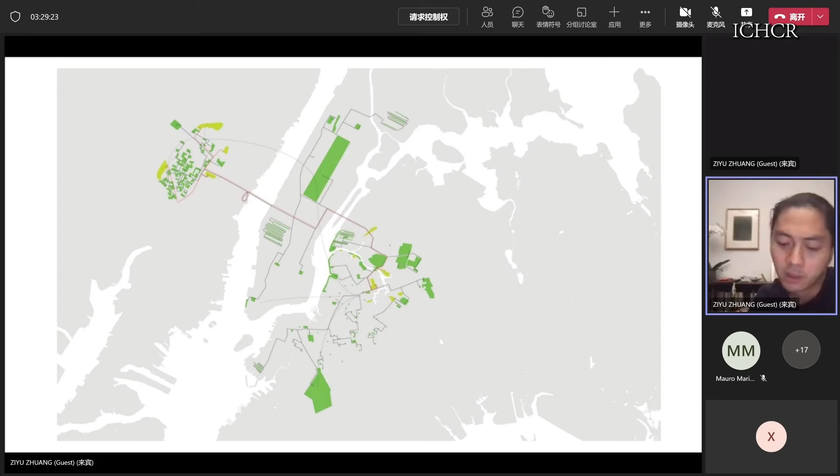So I think that's something really strongly linked to the recent practice. We did a lot of urban design projects, but the current interest for us is more architecture and interior. But still, I think our approach is not only in architecture, but always thinking about larger society and linking with the people and the community, even for interior design.

So earlier, just after graduating, I did a competition in Beijing with one of my classmates. It's talking about shifting scale - the inner city very dense, and coming to the new city, the structures, everything's getting big.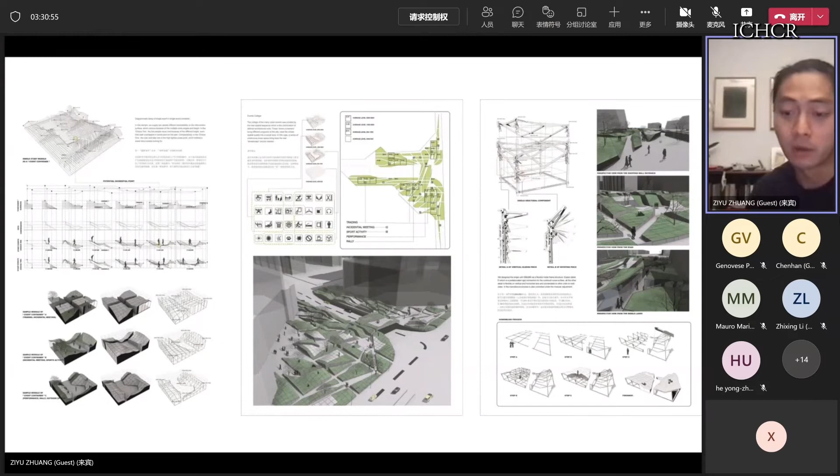So basically this is creating a kind of instant landscape - more like an installation, creating a kind of landscape, and there's certain space below, but also making some calculation mathematically to predict if people can meet together or be detached. So this is creating a new network for people to meet each other, but also offering certain space as infrastructure - for example, some parts are higher, then you have a shop, some parts are more open, then you have a gathering space. This is a very early competition we did.

But I think this one reminds me a lot of recent projects we have, and it somehow became an identical project we did. As I mentioned, we did large-scale urban design like Tianjin Culture Center with my partners in Germany, and also earlier, 12 years ago, we did the Qingdao railway station urban design. We won a lot of competitions, public buildings like Tianjin No. 4 Middle School.

And of course, also the... sorry. Sorry. Yeah. Just one second.

So also some combination works with, for example, Nishizawa, Mario Botta, He Jingtang - one of the old generation famous renowned architects - and also us. This is more like a collaboration with independent culture buildings. Each of us is more like an organizer for them to connect all of them, so the connection piece is also designed by us.

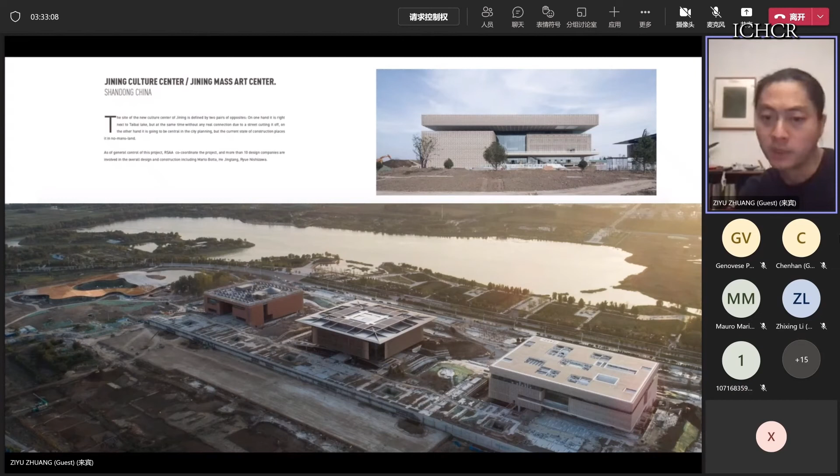But still, you can see those projects have a very strong identity - you call that a German office, you can call that a very practical way. So we try to identify ourselves, who we are, because we're practicing in China. So we start to look at what's going on here, or what's going on in the past in China.

So we pick a new office, between the Drum Tower and Bell Tower in Beijing. We're thinking about the roof - what's the meaning of the roof in China? But they're never used as a space or functional space. So we create a new kind of roof - the roof became a party space and more like a celebrating space for us.

And visitors, everyone loves it. We had a kind of online lecture, or more like a symposium there, inviting different artists, photographers, and curators. So basically, that's the idea.

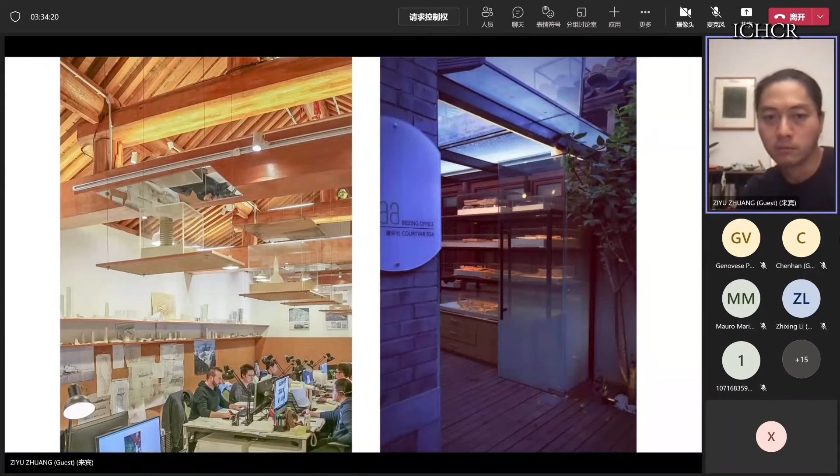We insert the interesting point, or more like create more scenarios in terms of sections and plan. So the scenarios also take the pieces of what's the memory of the information - those pieces together with when you're going in and walking around, you feel it differently.

Also, we take the views that can be introduced - for example, the Drum and Bell Tower, which has history, has a reading context as a backdrop. The information itself of those two towers can be introduced into the space so that the space itself becomes more interesting. That's why people are interested in Hutong or in Shanghai Linong - those kinds of old traditional areas.

We find out that there is more information being read, being digested together with the space. So if there's an empty space, you don't really read anything. But if there's a certain context, certain stories and information that can be digested, then there's more density of information - that's much more interesting of the space we can find out.

For example, we did an installation just introducing one Hutong area. We found a lot of information and interesting stories, but they built a new big tower there, which is an office space, so of course you don't find those pieces, those urban fabrics and interesting pieces there. So that's a very urban design view to look at. We also did research on the densities of that information and what can be read as layers.

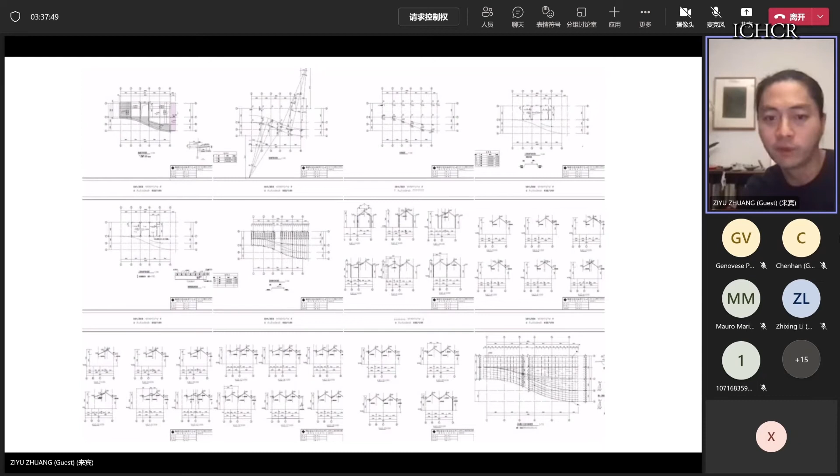We're thinking about sections. Cross sections really deliver—not only where traditionally people think the plan delivers the functions—but we think the section also delivers a lot of interesting, even hidden, feelings or hidden phenomena.

So in one project called Tony Recluse, we have different layers read from the local architecture, and we're overlapping them, going from one pitched roof to two.

So this is a smooth change, versus something static, right? It's really like a kind of movement of the roofs across those pieces, and each piece is different. You read them in perspective, and it gives you a different feeling—this movement of those pieces moving ahead, which is also the section.

And of course, in the Chinese way, we frame them out, and this view becomes very interesting. But I think the emptiness is more interesting for us—it's more like a clear diagram to talk to, in between.

Also for the interior, we have different views looking outside, high windows going up, the floating gesture of the box, and the courtyard in the middle, with more solid space on site. So introducing across different sections, the landscape and views from the exterior into the interior.

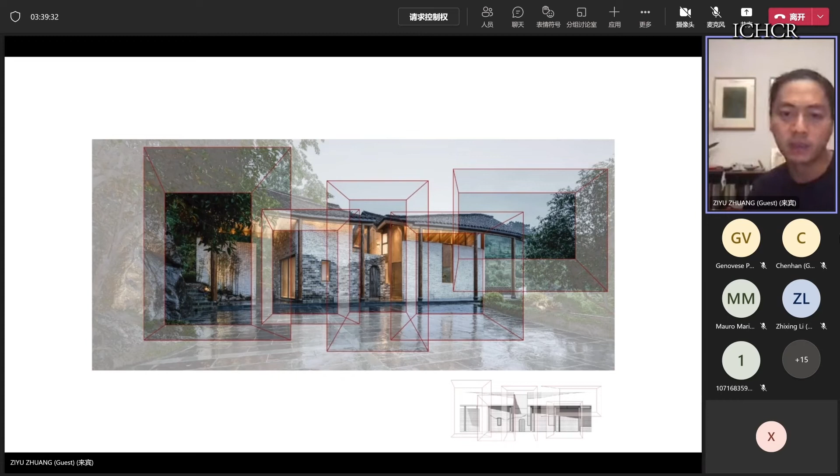This makes the space create more richness. So you don't have to do too much interior decoration, because basically the relationship and positioning of those spaces, and all those independent stories and independent multi-perspective views, is what we're looking for.

But this is a small building, so usually we do bigger projects. So I was proposing to enlarge that 5 times, 10 times, 20 times, so you get a lot of talking frames, talking views and openings, but you don't really have a building for such a long view.

So we made a Chinese scroll. You read it in a multi-perspective way, and you get even more sections, because there are more diverse possibilities—some are all-day dining restaurants, some are big rooms.

Some are pavilions and exhibition rooms, some are a courtyard in the middle, and you have two little apartment and hotel rooms on the side. So this system, from these different perspective views, looks really different.

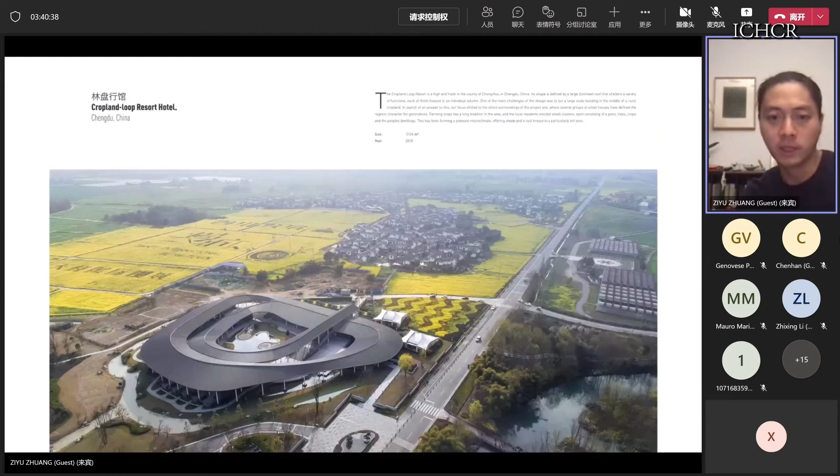That's also talking about different scenarios in one big space, where it delivers a homogeneous quality of this floating gesture, but inside, outside, different heights—you get a very different feeling of the space.

So from this one, jump back to the Chinese scroll painting. We're thinking not only about that painting, but about the topography changing, where also the typological layers come into play.

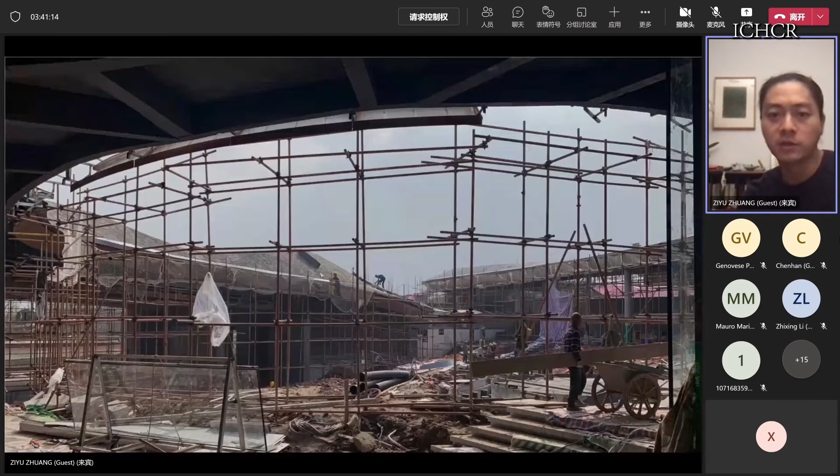Just to jump quickly - this can also extract into a space and deliver the space, combining concrete and steel structure, with exterior and interior worked out at the same time. The thing belongs to the environment and mountains in the back, but also has its own scenarios. The walls, the layers of the walls, the openings of the walls give you the delivering of space, going from one yard to another. You also have lower and higher walls to separate space and combine different qualities together with the landscape, interior and exterior. From this we create more prototypes.

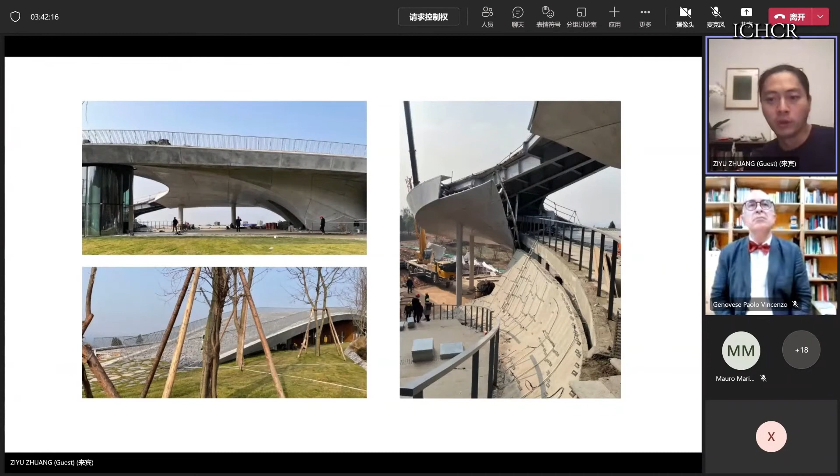This is probably one fifth of the projects we did, but I'll go through quickly since there's no time. You see production levels 1.0, 2.0, 3.0 - this is the latest version, a new project in Chengdu.

There are openings with a swimming pool, view windows, and the lower part is a restaurant. This is a new pavilion next to Guangzhou, with layers overlapping to extract pure church geometry, and the cave gesture being a softer core.

This became really popular in China - in one week, more than 1 billion clicks. So people love this kind of architecture.

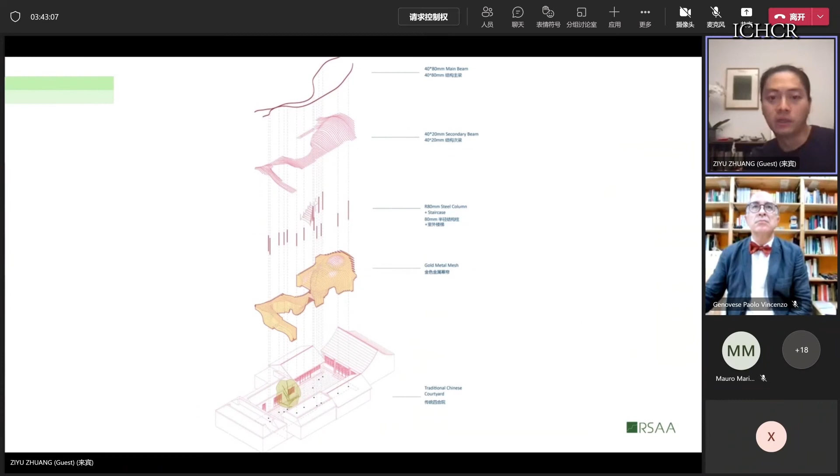We have a second version, under construction, which can also be an installation like a pop-up store for Nestle cafe. It can also be installations with this curved shape but different layers, more like a maze, but cut out, so people of different heights have different paths.

It can also be light installations, or something like a bigger scale installation built in Shenzhen. I'll go through this quickly.

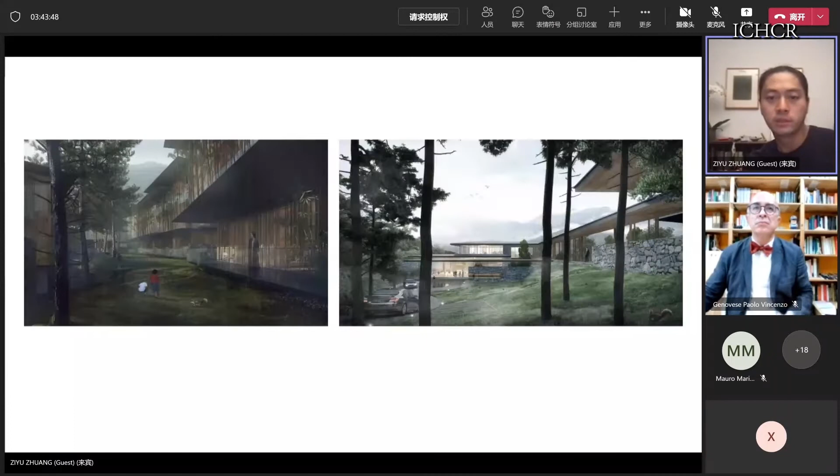Just to show, this can also be adapted into my teaching courses at Tianjin University - 8 students, 8 different locations, linked as more like urban connections. Each piece has its own expression, and it can be something more like a resort prototype research, even larger scale, more than 100,000 square meters hotel.

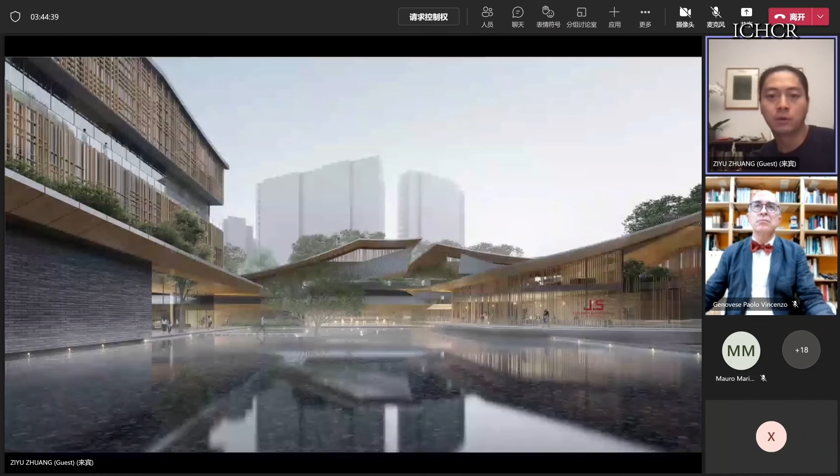I did this 8 years ago, finished last year - Nanjing Hyatt, Unbounded Hyatt, and also Indigo. But this one is more like a resort, and could also have a kind of vertical gesture for those.

We also did this like an illustrator, to express our idea really quickly to people. I think that's it, sorry.

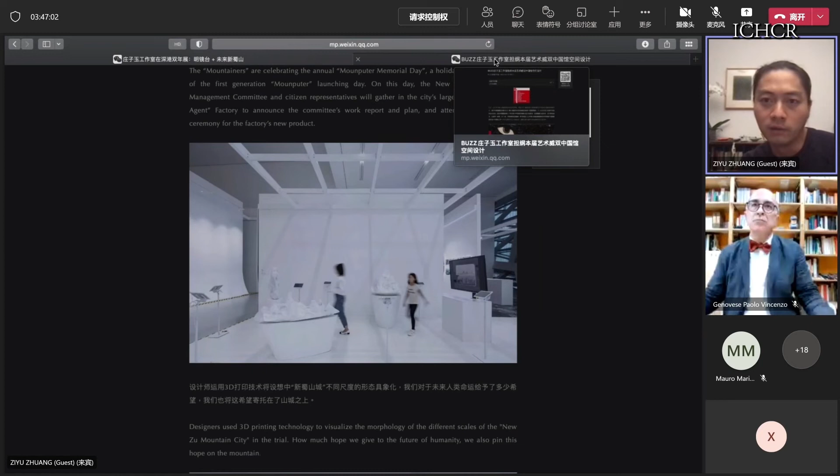We also applied this because I'm also a designer for the Venice Biennale, China Pavilion this year, for the art Biennale. We designed this, more like an exhibitional version combined with my artist friends' visions, creating a small Chinese garden - this is more like a small scale version of those future city models we're talking about.

Thank you very much for the vision of the present and the vision of the future. Thanks a lot. What I noticed in your work, which impressed me very much, is that all of you Chinese guests, it is very clear in your work that you really represent a new generation of Chinese architects, where the idea of copying or introducing postmodernism is completely gone. You also work with a very strong concept. What makes me very happy and interested in contemporary and future Chinese architecture is that all of your projects can only be done in China. So you really have the Chinese touch. It is no longer an import of a certain kind of language and style from Western countries, but this architecture can only be Chinese. Very good. Congratulations on your work.